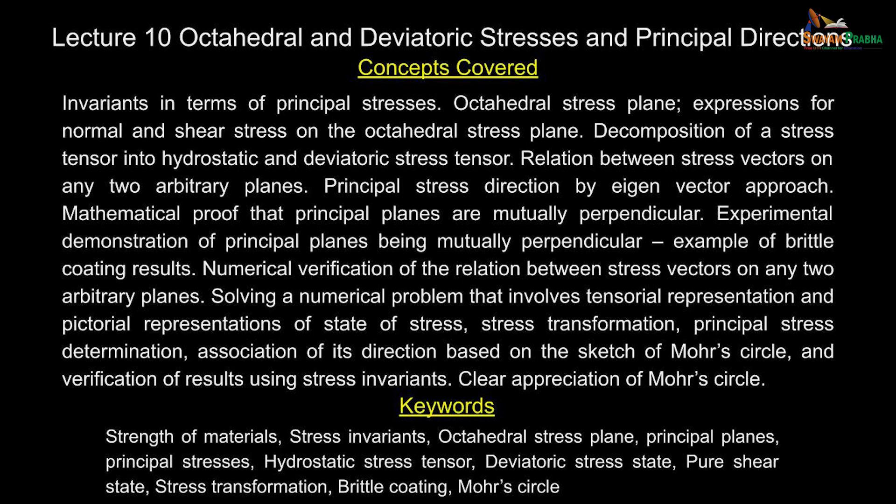See, we have been discussing principal stresses, and I said if you express the stress tensor at a given point in terms of principal stresses, there are certain advantages. Your mathematics becomes a lot simpler. And while developing the principal stresses, we have also looked at what stress invariants are. Stress invariants help us to have inbuilt checks in our calculations.

That is one advantage. The other advantage is it can also be used to investigate whether the given stress tensor corresponds to a simple uniaxial stress or pure shear stress state. Fine. We will also look at what the other aspects are.

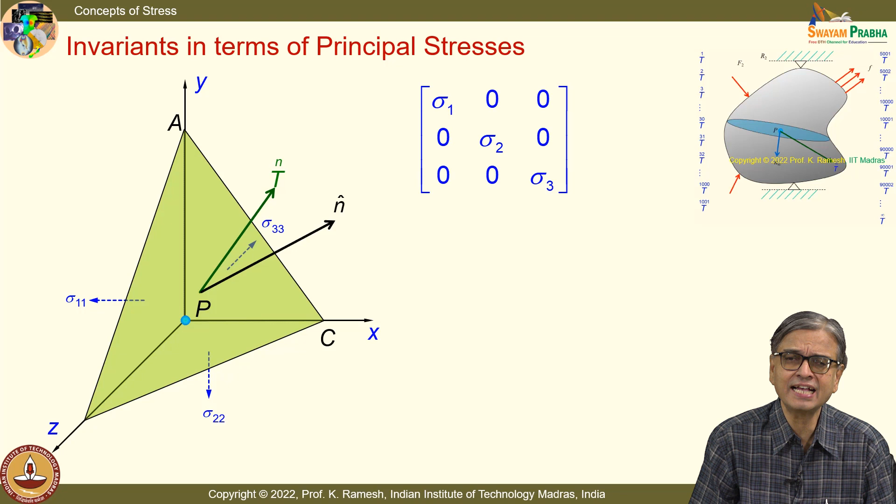See, when I look at the stress tensor in terms of principal stresses, and in order to distinguish, I have put this in a different color. You can also see that these are all normal stresses, and the invariants become very simple. Can you write the invariants I1, I2, I3 quickly? You know the definition of the invariants. I1 is straightforward, that is very simple. You should be able to write I2 as well as I3. When I express it in principal stresses, the computation is so simple and straightforward, it hardly takes a minute.

Fine. So, I have I1 as sigma 1 plus sigma 2 plus sigma 3, and I2 simply becomes sigma 1 sigma 2 plus sigma 2 sigma 3 and sigma 3 sigma 1, and I3 is sigma 1 sigma 2 sigma 3. So simple and elegant. So, there is good reason to visualize the stress at a point in terms of the principal stresses. And I also said many of the failure theories are essentially constructed around the principal stresses. Fine. So, it has an advantage, and you can combine loading from various individual loads, assemble the individual stress tensors to get the final stress tensor, from it get the principal stresses and adopt one of the failure theories.

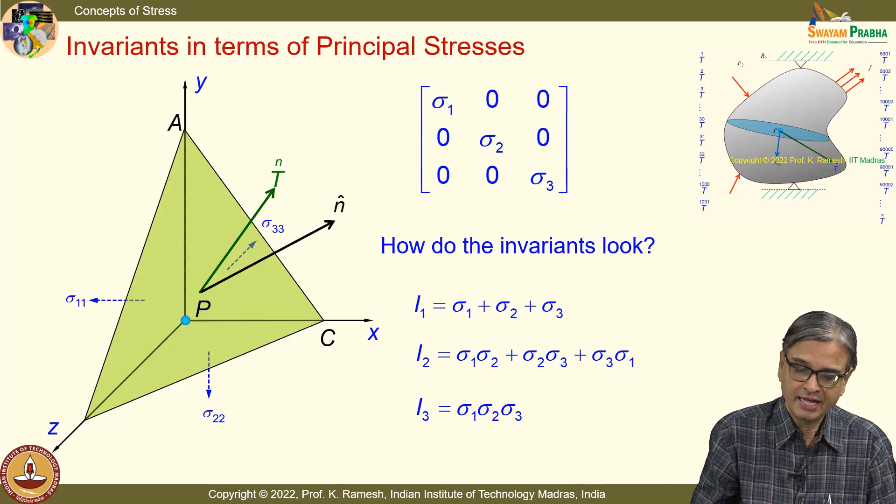And people have also looked at newer planes. I said some planes are very important. We have looked at the principal stress plane, we have also looked at the maximum shear stress plane. Fine. From principal stresses, people also looked at, when they were working on plasticity, what are known as the octahedral stress plane.

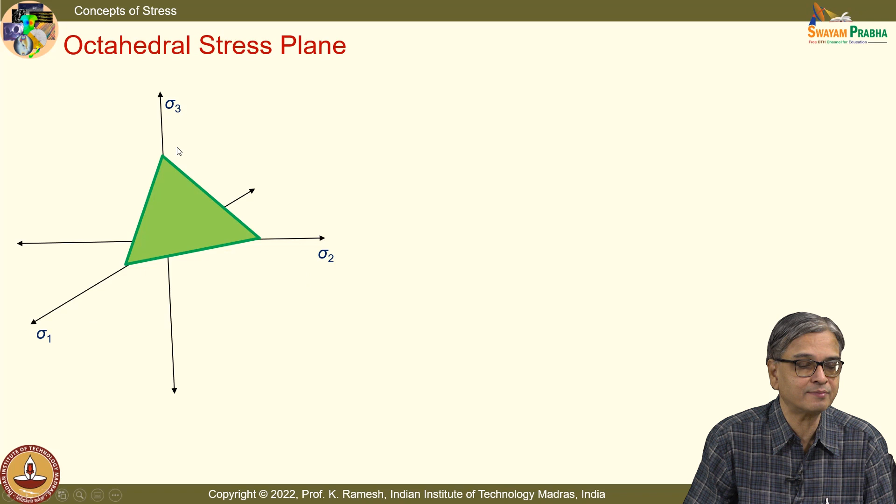And what you have is, I have the reference axes as sigma 1, sigma 2, sigma 3, and this plane is equally inclined to the reference axes. And we have already said certain planes are very important, and in that list you also include the octahedral stress plane. Why is it called octa? I have this quadrant, I can have 4 such in the top half and 4 such in the bottom half, then I will have 8 such planes identified.

And whenever you have an arbitrary plane, the stress vector can be resolved into a normal stress component as well as a shear stress component. And we have looked at how brittle materials fail by normal stress, and ductile materials are sensitive to shear stress. And once they have determined this octahedral stress, they have also looked at what happens to octahedral shear stress. I said multiple failure theories have been created.

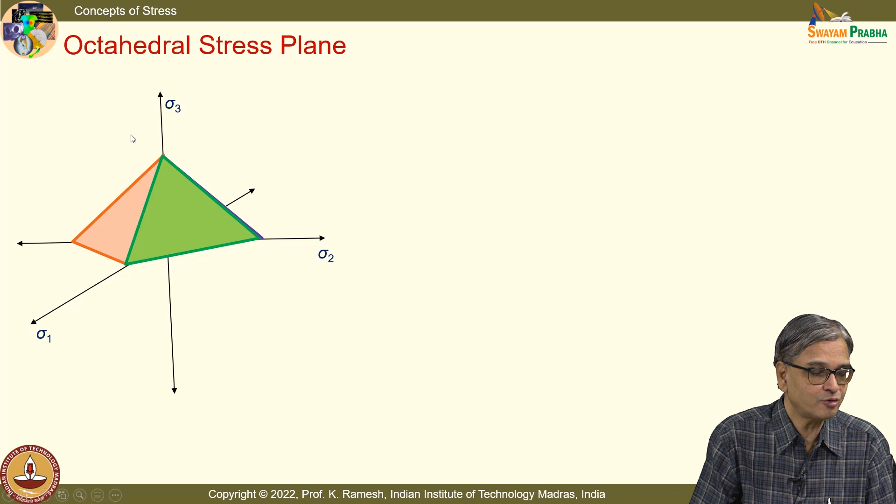So, when you understand the state of stress at a point, whichever aspect, if it is a normal stress, what happens when the normal stress reaches a critical value. If it is a shear stress, look at what happens when it reaches a critical value. On a similar line, people have also developed theories on what happens when octahedral shear stress reaches a critical value. So, for the term octahedral, I can have 4 such planes in the top half and 4 such planes in the bottom half, and they are nicely colored to give you some enthusiasm in learning this course. Do not think that these planes are colored, okay.

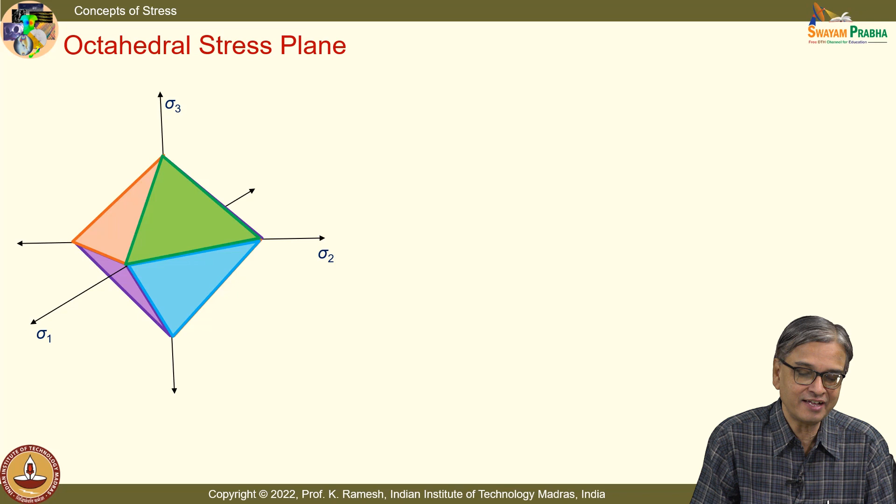These are normal planes, colored only to keep your attention, and the development of this goes to Arpad Nadai. I mean, he lived very recently. See, the plasticity theory really developed in the early part of the 20th century. Fine. And people thought they needed this octahedral shear stress also. Now you can find it out, because you have sigma 1, sigma 2, sigma 3.

In the last class I said, when I have a plane, the plane is now defined, it is an equally inclined plane. You can find out mathematically the expression for the normal stress and the expression for the shear stress. Can you work it out and then check it with me?

Because you were supposed to do a homework yesterday, I am not sure whether all of you have done it, because the ground rule is you tell the homework, it is never done.

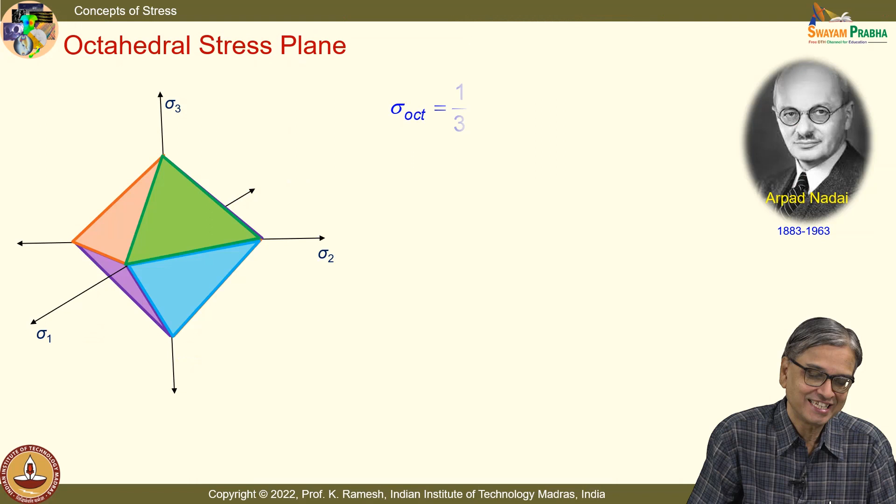Okay. So, I have octahedral, the normal stress is very simple to write, that is 1/3 of sigma 1 plus sigma 2 plus sigma 3. I get this as, in terms of invariant, 1/3 I1.

You can also write the octahedral shear stress, and you will find that that can also be expressed in terms of the invariants. Okay. And the tau octahedral is given as 1/3 of sigma 1 minus sigma 2 whole square plus sigma 2 minus sigma 3 whole square plus sigma 3 minus sigma 1 whole square, and the entire expression is under square root.

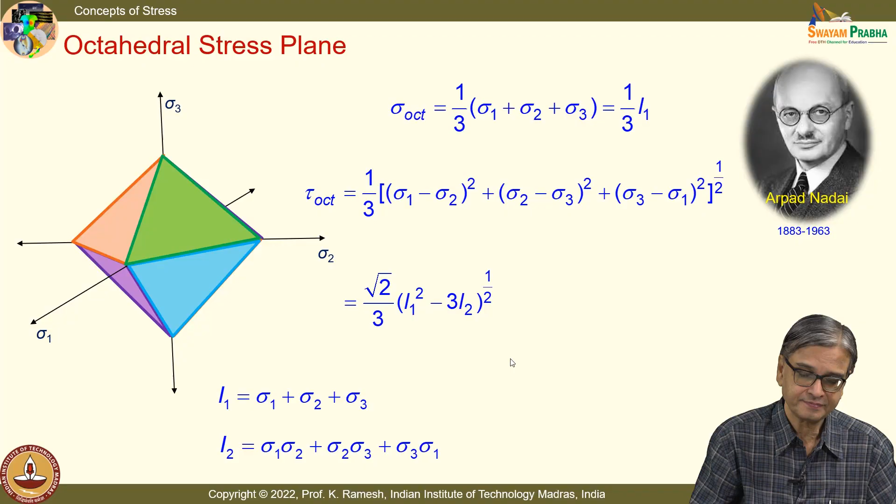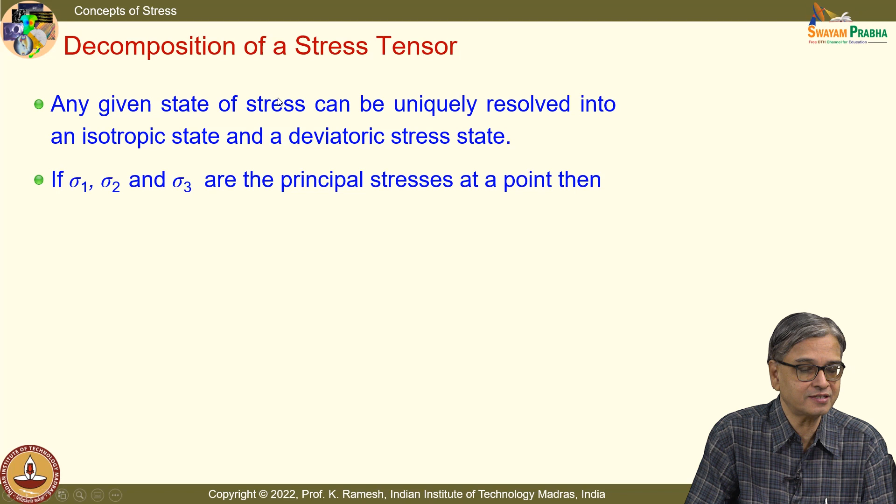And people also thought, I have been saying that we are happily living in linear elasticity. So, I can superimpose stress tensor, and any given stress can be uniquely resolved into an isotropic state and a deviatoric stress state. So, you have to look at the stress tensor, the way I decompose, and you have to figure out what is the meaning of deviatoric. Okay. So, I have the stress tensor expressed in terms of the principal stresses sigma 1, sigma 2, sigma 3. So, you will write the stress tensor in this fashion, sigma 1, sigma 2, sigma 3 in the diagonal term,

and this is written as a superposition of an isotropic state. That means I have a constant value. The value of P is identical in all the three directions. That's what happens when you immerse anything inside a fluid bath. Suppose I have put it below 100 meters in a liquid, you find it is a hydrostatic compression. Okay. Now we have to choose what is P. What is the way you have to select P? That matters. And P is taken as 1/3 of sigma 1 plus sigma 2 plus sigma 3.

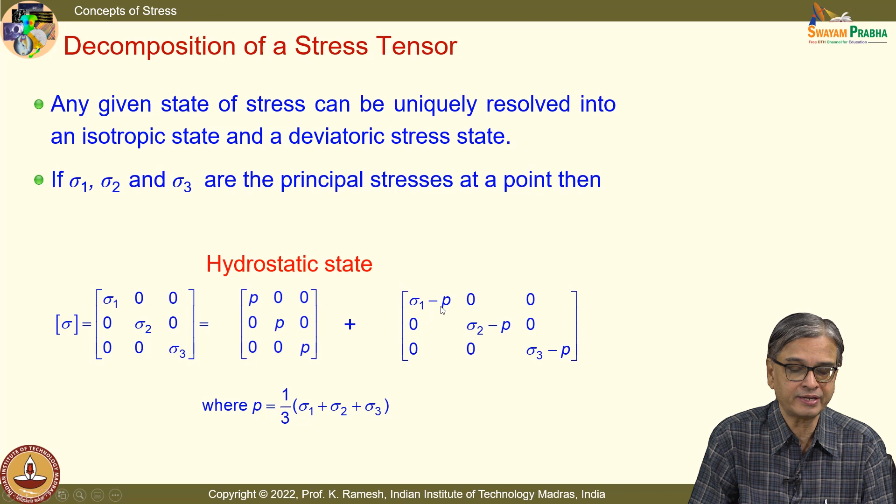So, can you fill what should be the stress tensor that adds up to sigma 1, sigma 2, sigma 3? Can you fill the next one? You can easily do that, because I have separated out a part where the stress magnitudes are P, and we also understand that this is a hydrostatic state. And if I have to have the addition equal to sigma 1, sigma 2, sigma 3 on the diagonal, the stress tensor is simply sigma 1 minus P, sigma 2 minus P and sigma 3 minus P.

Can you comment from whatever you have learned so far what this represents, from what we have discussed? Anybody can make an intelligent appreciation of what this stress tensor is? This is definitely called a deviatoric stress state. I have not deliberately given what is the other name. I want you to find out and tell me from what we have learned so far.

I can give you the clue. Use the invariant. We have looked at invariants have some advantage. It is learnt very recently. This stress tensor represents what kind of stress state? That means you are sleeping. You are not exercising your mind. You have learnt it just in the previous class.

I am asking, you have a stress tensor. When some stress tensor is given, you can find out what stress state it represents. I gave a clue that you can arrive at the stress state by looking at the invariants. And this is a simple mathematics that you will have to do. Somebody said, I am able to hear some voices. Yeah. This is? Because I1 is 0. You should be able to see that. See, if you don't see that, then you are not learning. It's not that you simply copy down whatever is discussed in the class without assimilation. You are able to see now? I have separated this stress tensor into two components. One is a hydrostatic stress state.

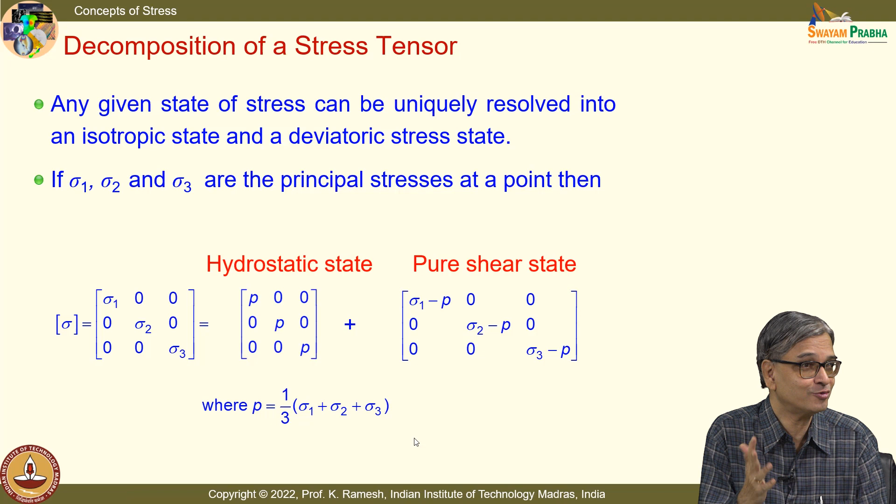You understand? If there is truth, whichever way you start and investigate, I must get one answer. Only that is truth, no matter which way I have looked at it. While developing the state of stress at a point, we looked at a graphical representation like the Mohr circle. We understood how to evaluate principal stresses. Then we did mathematical development. That also gave identical expressions, isn't it? We will also see some experimental information which will add up to this knowledge. If you look at any of these branches developing, people have verified it again and again. Because you are developing a new body of knowledge, it has to be verified. It's not that you wake up from your dream and say this is the result and everybody should accept it. Science doesn't go that way.

Let us go back to the orientation of the principal stress using the Mohr circle. This is a very useful utility of a Mohr circle. You don't have to sketch it with geometric accuracy. It can be used to find out the principal stress orientation unambiguously. And you have this principal stress 1. It is given as 2 theta 1. This is an acute angle, and you have an obtuse angle with respect to the x-axis for the principal stress direction 2. You label it as 2 theta 2.

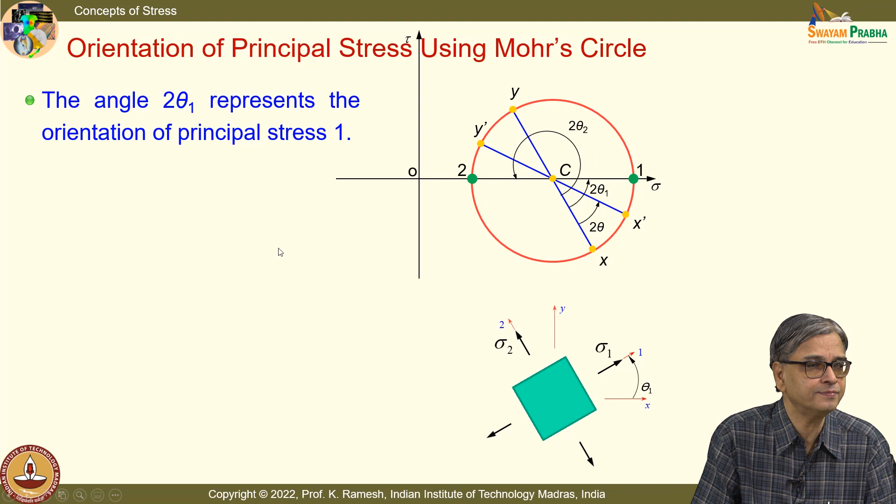And why do you need this? When you have the expression theta equal to 1/2 of tan inverse of 2 tau xy by sigma x minus sigma y, you have to recognize that this is a multi-valued function. It is not a single valued function. Once you get the result, you will have to investigate which of them represents the principal stress 1 direction and which represents the principal stress 2 direction by making a simple sketch, and you can quickly find out. I would like you to develop that habit. When you have sigma 1, sigma 2, sigma 3, you arrange them algebraically. You cannot do the same for theta 1, theta 2, theta 3.

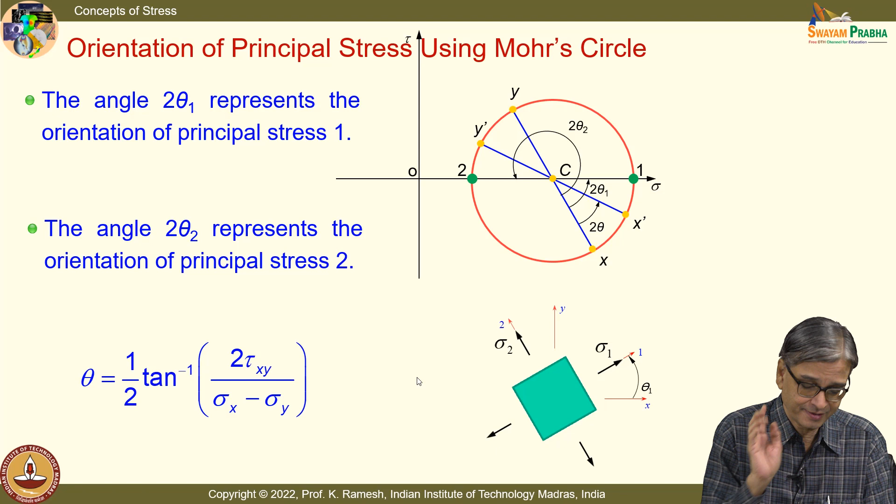When sigma 1, sigma 2, sigma 3 are distinct, I will have different directions associated with the principal stresses, and they are mutually perpendicular. We have seen mutually perpendicular from the Mohr circle, fine. We have still not established it as mutually perpendicular from a mathematical perspective. I will also try to give an experimental perspective which was done in the early part of the 20th century, so that you can get convinced when I say principal stresses, they are mutually perpendicular. These are all very celebrated results. The celebrated results have been verified multiple times in the history of evolution of engineering.

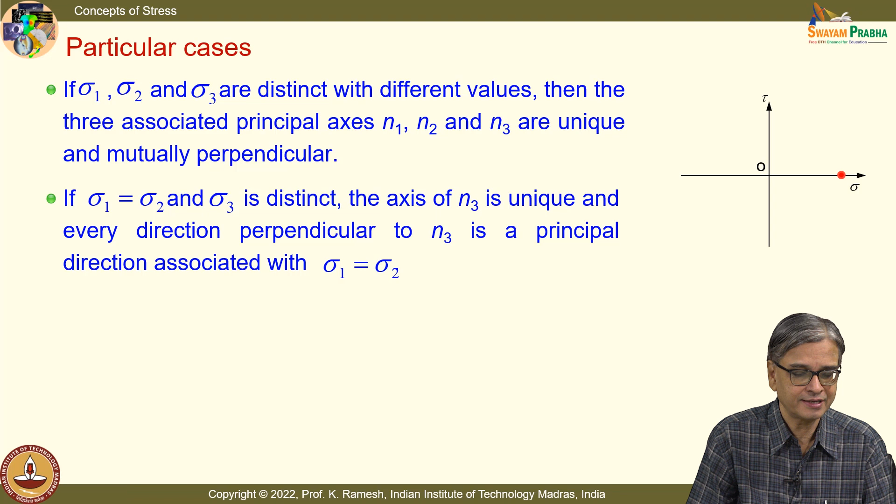Suppose I have sigma 1 equal to sigma 2 and sigma 3 is distinct. What happens to a Mohr circle? It becomes a point. Is the idea clear? When you have that as a point, the expression for the radius goes to 0. When this goes to 0, it implies shear stress is 0, and zero shear stress is the definition for your principal stress planes. That is the reason why every direction perpendicular to the sigma 3 direction is a principal stress direction. On this plane, every direction is a principal stress direction. So, these are all special cases, fine.

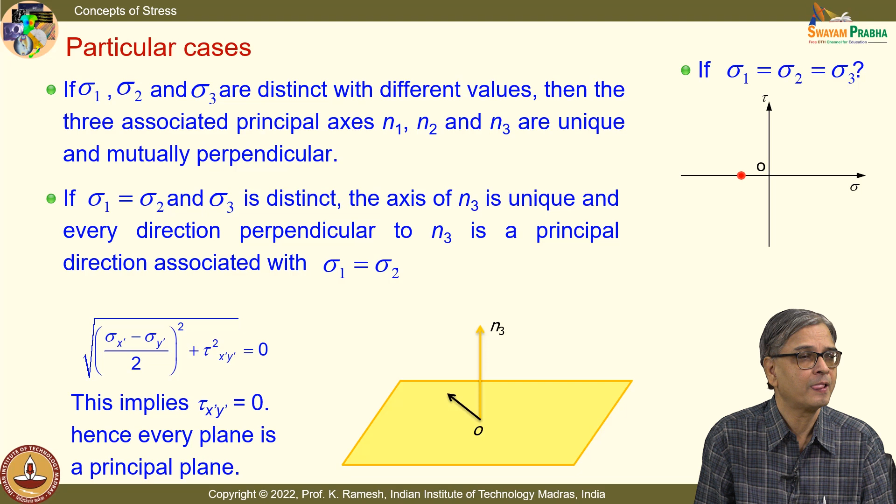While developing the principal stresses mathematically, I made a statement that this can also be solved as an eigenvalue, eigenvector approach, but we did not solve it like that. I got the determinant as 0, I pulled out only the 2-dimensional case, and it was a quadratic equation, so it was tempting to solve by a simple quadratic approach, and we got the numbers. We got sigma 1, sigma 2, sigma 3, we never worried about the directions. Now, we will see how I can evaluate the orientation from a mathematical approach, because you are living in the computer world.

If you depend only on a graphical approach, it will not help these days. So, you should also have a mathematical methodology that helps you to do that, and it is very simple, very straightforward. I just take a two-dimensional case. In this case I have the eigenvalues as sigma i, representing 1 and 2, and the direction cosines associated with this are given with a subscript i.

If I take a two-dimensional case, I already find out the principal stresses using the quadratic expression. So, substitute sigma 1 instead of sigma, and I have this expression. Can I use this to solve for nx and ny? You have two simultaneous equations, you can easily solve for two unknowns. It is straightforward. I use the second equation to get the expression for nx, and we also know nx squared plus ny squared equals 1.

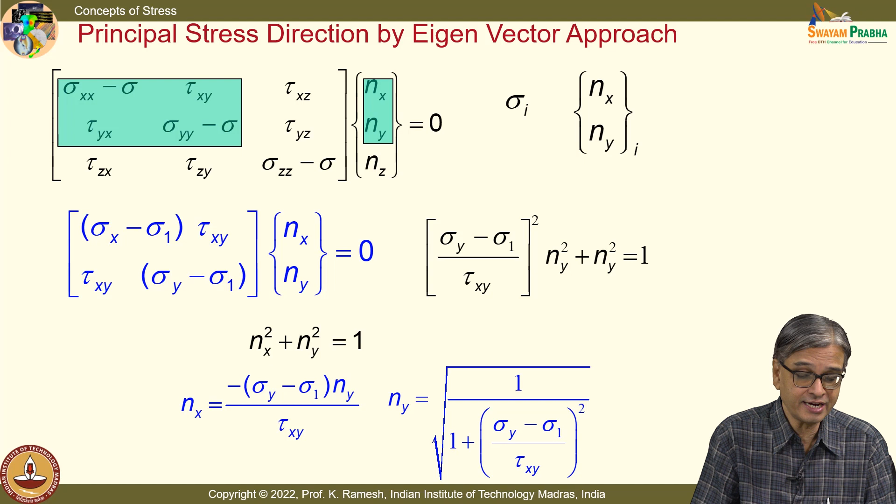isn't it? So, you should investigate what happens when ny is positive and when ny is negative, and I get the theta orientation in a simplistic manner as theta equal to tan inverse of ny by nx. So, take up a simple stress tensor and find the principal stress direction using your conventional approach of Mohr circle, and also use this and substitute for both the positive root and negative root, and have a clear understanding of how this expression helps you find the associated direction. If I have taken sigma 1, this will invariably give you the direction of sigma 1 only. You do not have to go to Mohr circle and then verify. Convince yourself by solving test problems created by you. Is that idea clear? Okay.

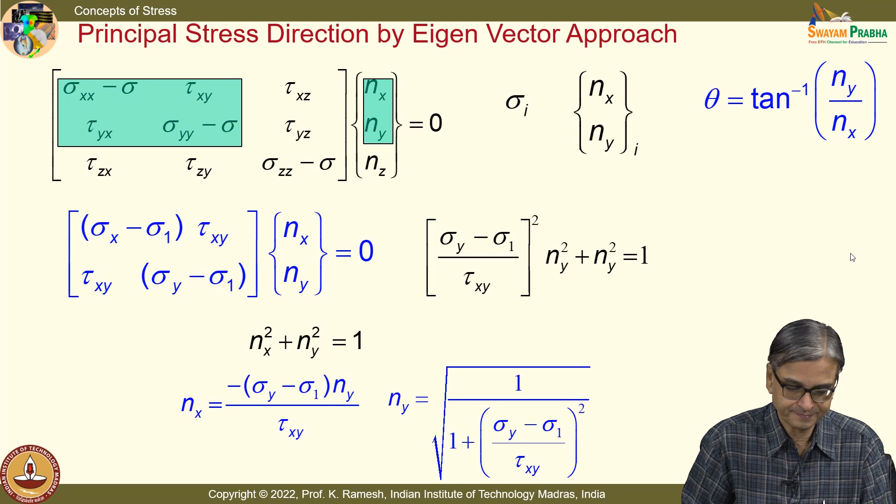This also I asked you to try yesterday as a homework. How many of you tried? Once people develop certain concepts, the mathematicians do not keep quiet. They try to find some identities. Suppose I take a point, and an arbitrary plane n, and I know the stress vector is Tn, and I take another arbitrary plane n prime. With our symbolism, the stress vector acting on that is Tn prime, and mind you, these are vectors. We have already understood, so we will not put the vectorial notation. It is easy for us to interpret once you understand the nomenclature mentioned in the earlier classes.

You have an identity: Tn dot n prime equals Tn prime dot n. This is a vector, this is a vector, and this is the representation of the dot product. Whatever software we have used to write the equation puts the dot product only like this. Earlier I tried to show it with a big dot, later on I gave up, because it is becoming difficult to edit every equation. So, you understand that this represents the dot product. This identity we will verify, and we will also use it to show that principal stresses are mutually perpendicular.

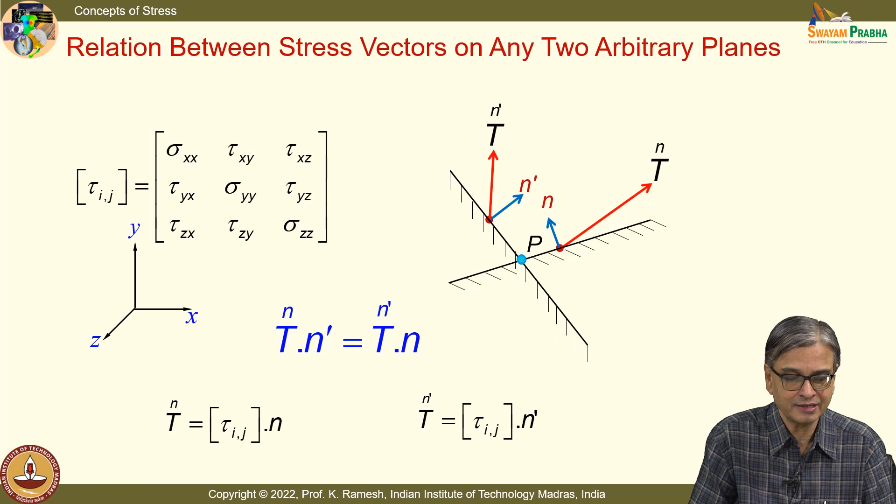First, we will take this identity. If you have done the longhand mathematical expressions, if you have calculated what is Tn prime, and if you have done the dot product, you would have got both the expressions identical. Fine, which you should have done as a homework. Nevertheless, we will verify it in a different manner. But before that, I would like to show mathematically that principal stress directions are mutually perpendicular.

So, I take this identity and say that the principal stresses are sigma 1 and sigma 2, and from Cauchy's formula I can find the stress vectors Tn and Tn prime. If I look at the identity, they have to be equal like this. So, if I substitute for Tn and Tn prime, I get sigma 1 n dot n prime equal to sigma 2 n prime dot n. In a generic problem, sigma 1 and sigma 2 are not equal. But if you have to maintain the identity of this, what should go to 0?

You get the point. The dot product of n and n prime should go to 0. That is what this equation says. When I have this identity to exist, if the dot product is 0, the identity is validated. When does the dot product go to 0? When the directions are

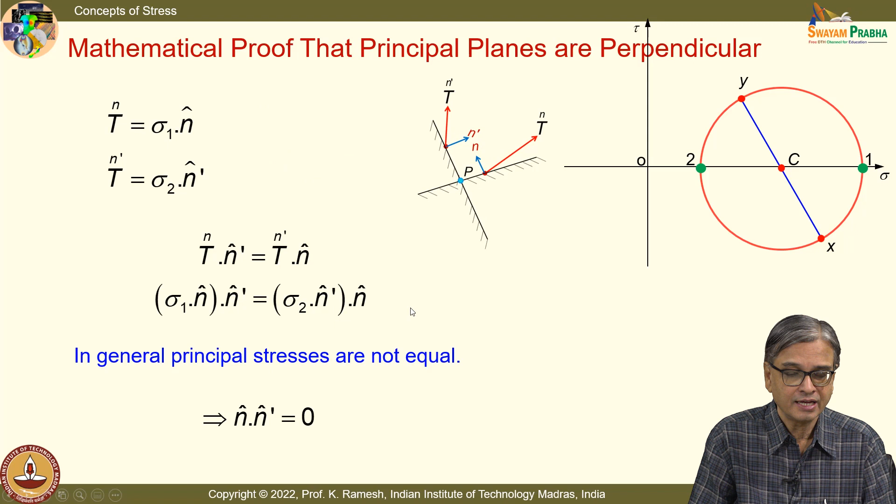mutually perpendicular. Okay. So, that means I have this one on diameter, which we have already learnt while doing the Mohr circle, and you have these two planes perpendicular to each other. The principal planes can only be perpendicular. It is a mathematical development. Fine. Now, we go and take a simple stress tensor and then verify mathematically whether this identity is existing. Okay.

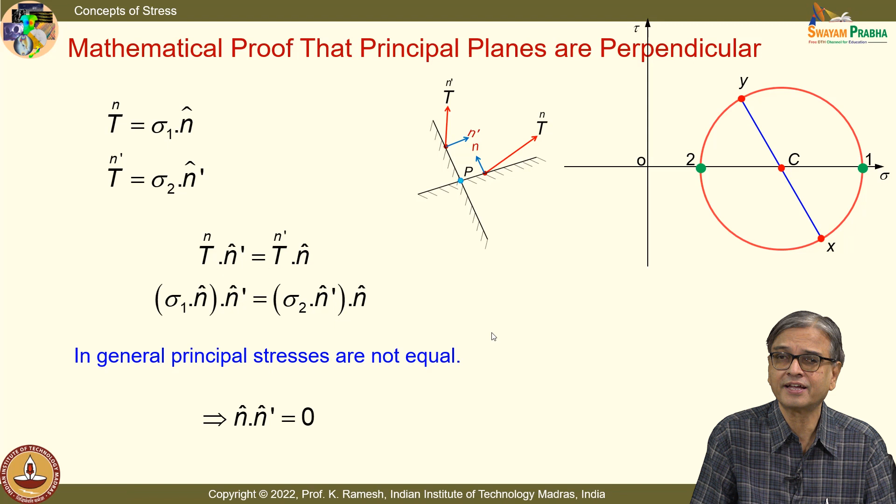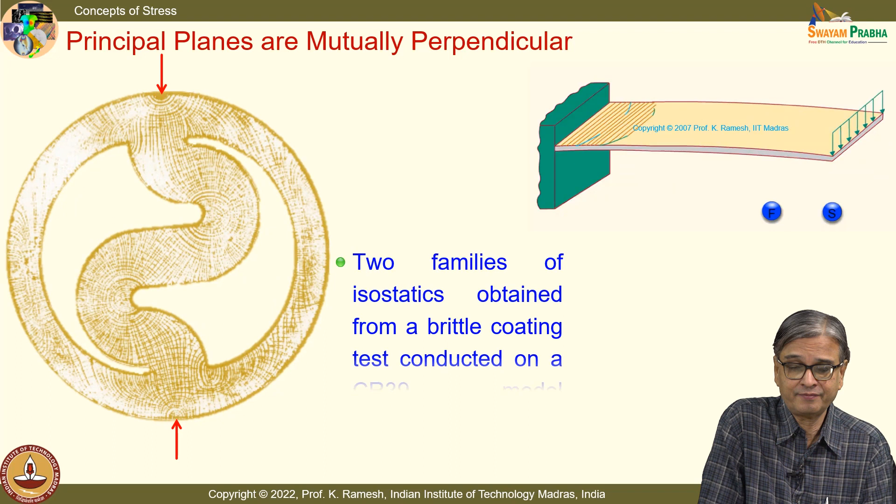Okay, before that I think I have experimental verification of this. See, you are all now familiar with failure of a chalk. How does a chalk fail? When the normal stress reaches a maximum, it fails. And we have also classified that kind of failure as associated with a material which is brittle. And what is done here, very beautifully, is a cantilever beam on which you spray a paint which is a brittle material. And when I apply the load, what you find is you have cracks getting developed.

Can you associate the crack to a physical reality? That means the normal stress at that point has reached a maximum. That is why the crack has formed. So, tangential to the crack is the principal stress direction, one of the principal stress directions. Perpendicular to that is the other. See, principal stresses are mutually perpendicular. So, the direction perpendicular to the crack as well as tangential to the crack are principal stress directions.

People have done this, and it is a very complicated experiment because it is done in compression. So, I have to spray the paint when the object is compressed, then slowly release it. I will get the first set of cracks, and then apply the load again and slowly release it. I will get the second set of cracks. If you see this here, do you see the two families of crack patterns? They are orthogonal patterns. Two families of isostatics, these are called isostatics, and this technique is called brittle coating. This was done in the early 1930s or so. This is the only experimental proof that demonstrates that principal stress directions are mutually perpendicular.

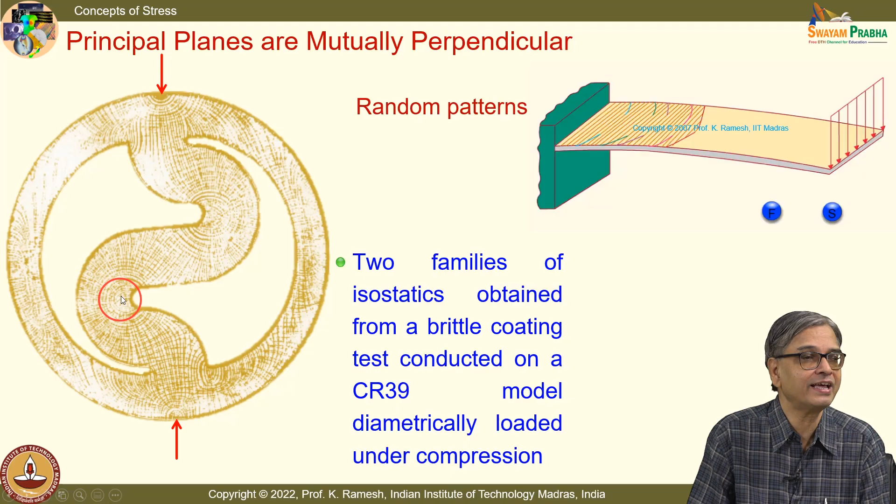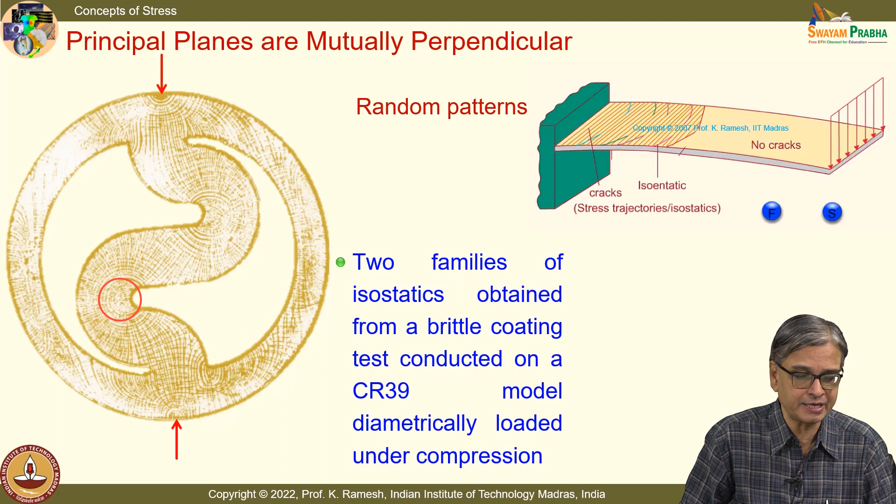But before that, I would also like you to see one region here. Here, if you look, the cracks are random. We have also seen that when sigma 1 equals sigma 2, every direction is a principal stress direction. So, that means a crack can appear in any direction depending on the local weakness of the material. Fine. And I also show a blown up image of this. Here you can see that you have two orthogonal families.

Are you getting convinced? Can you make at least a few line sketch of this region? I have one family of crack pattern, another family of crack pattern. They are mutually orthogonal. And this is demonstrated from point to point. See, you are actually discussing state of stress at a point of interest. When you go to whole field experimental techniques, you get a picture of what happens on the field. You need that kind of information also. Imagine stress tensors were developed in 1822 and your verification whether principal stresses are mutually perpendicular happened experimentally in the 1930s. Until then, they didn't have this kind of an experimental approach. And this convincingly proves that principal stresses are mutually perpendicular.

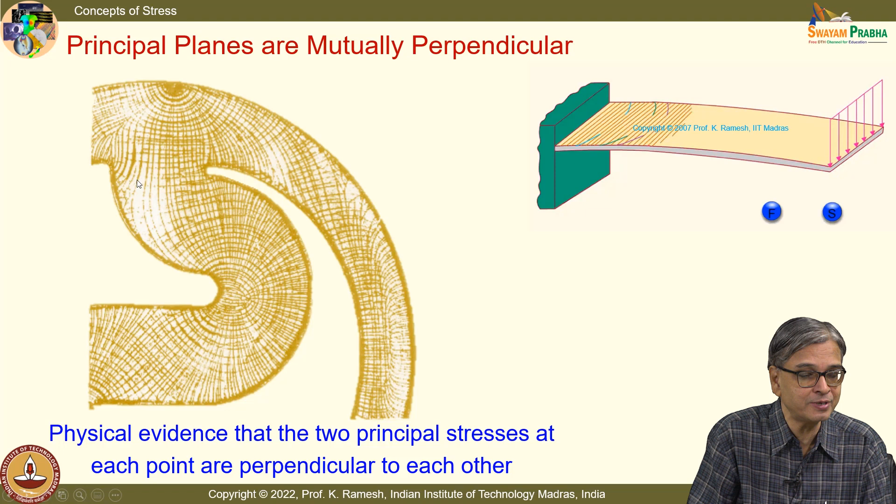So, in science, when people make statements, they verify them from various perspectives. So, when you do your mathematical calculations also, I want you to use these stress invariants and effectively use it to verify your results. You can verify it yourself. It is not that only when your answer book is corrected by me, I verify whether your answer is right. You can verify yourself whether you have got the correct answer when you do stress transformation, when you do principal stresses. So, certain aspects of a calculation you can verify. If there is a possibility to verify, utilize that. Don't be in a hurry, where you followed it, got some number and just write it down. I expect you to verify.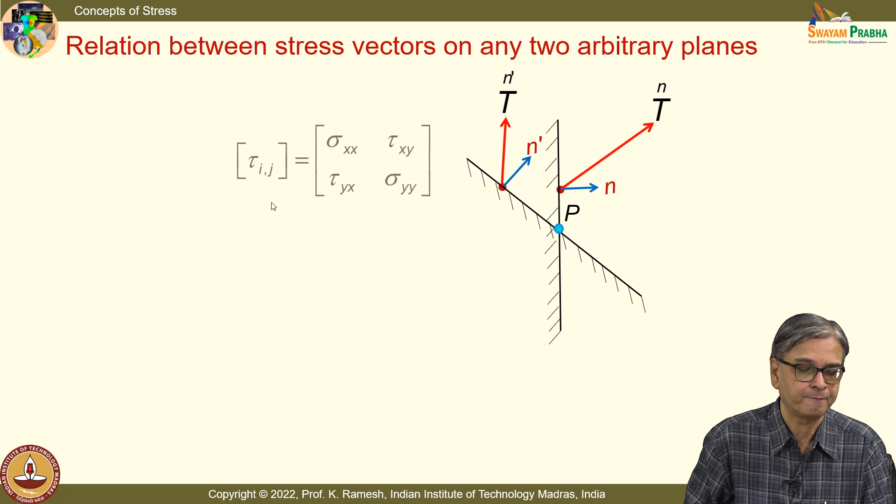So, I have the stress tensor given, I have 1, 0 as the plane, and I have this Tn dot n prime if I want to calculate. Can you get Tn from Cauchy's formula? And then you can verify what is Tn dot n prime. Very simple to do. I have n prime as 1 by root 2, 1 by root 2. I have all the quantities that I need.

So, when I do this, I get 100i plus 52j multiplied by 1 by root 2 i plus 1 by root 2 j. That gives me 152 by root 2. Can you do Tn prime dot n? When you do that, you will find that this is also identical. Very simple calculation, it is not very complicated or anything like that. But if you do that, you will remember the identity Tn dot n prime equal to Tn prime dot n.

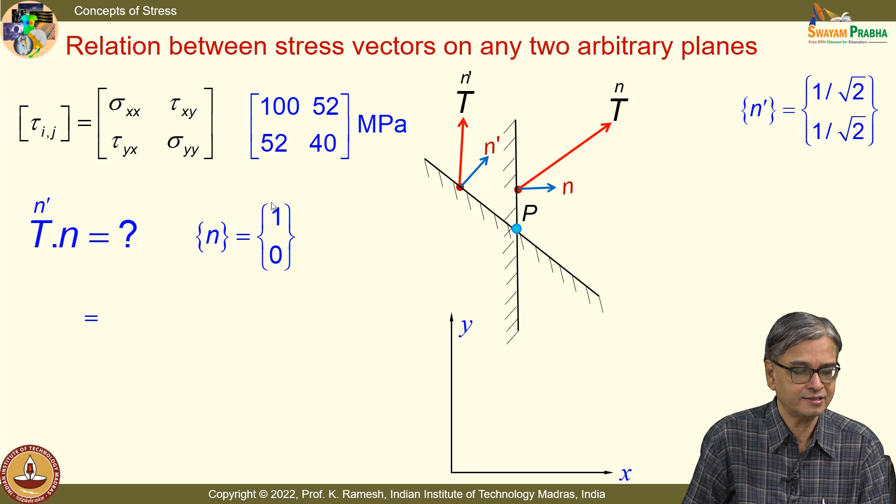I have the direction cosine. I have to get Tn prime and I have n, all the quantities are there. So, when I do this, I get again 152 by root 2. So, this shows that you have the identity. We have already utilized the identity to prove that principal stress directions have to be perpendicular mathematically.

And we have also seen by a beautiful experimentation called brittle coating, you have two families. You have also seen the whole field representation, not just at a point. That is very difficult to do. That is why it took so much time and it was done by Durelli. Fine. He was a proponent of that technique. Now, we will go for stress transformation, principal stress direction, and so on and so forth.

I have a pictorial representation. We have already seen you have a pictorial representation. Can you write the tensorial representation? If the pictorial representation is given in this manner, can you write the tensorial representation? Once you write the tensorial representation, can you go and give the graphical representation? You should be able to do it quickly, because we have spent sufficient time on developing the fundamentals.

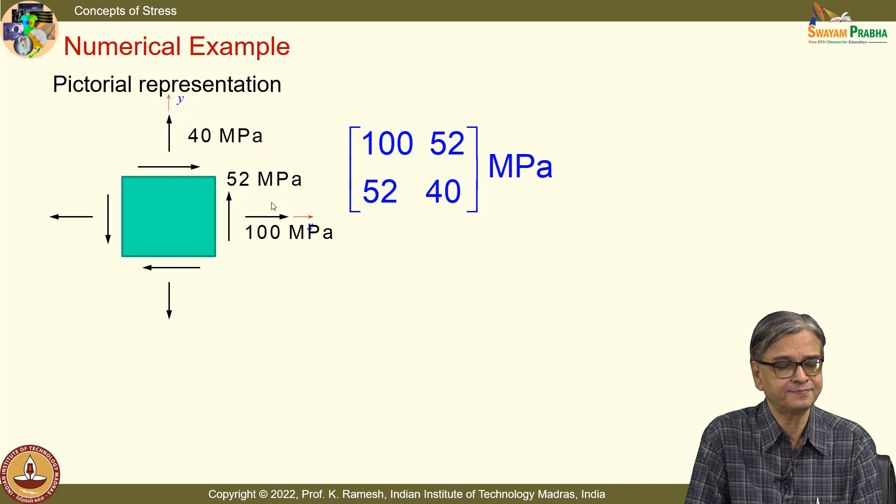Stress tensor can be given pictorially, can be written in tensorial fashion, can also be given to you in a graphical manner. I can also give you a Mohr circle and ask you to do calculations. So, the tensorial representation is the same one, 100, 52, 52, 40. And can you draw the Mohr circle? Mohr circle is very straightforward, and you have to mark the x and y plane correctly. If you draw it with the convention, if you rotate in the clockwise direction in the Mohr circle, you can also rotate in a similar direction in the physical plane to locate the plane of interest, whether it is clockwise or anti-clockwise, whichever way.

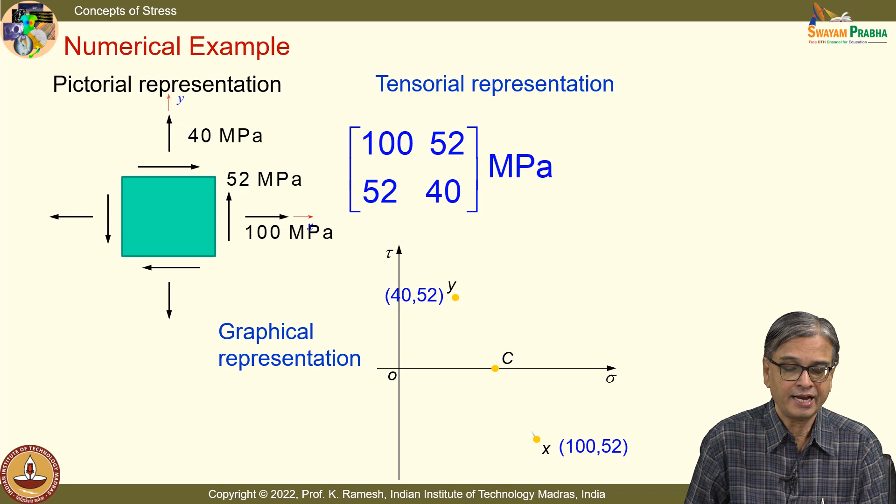So, I have the graphical representation like this. I have the sigma and tau axis. So, x plane will come in the first quadrant or which quadrant? Fourth quadrant. Okay. So, I have the x plane, I have the y plane, join them and I get the center and draw the circle. So, I have everything. Any plane of interest, if you say, I can go to the Mohr circle and get it, but we would also like to do it mathematically.

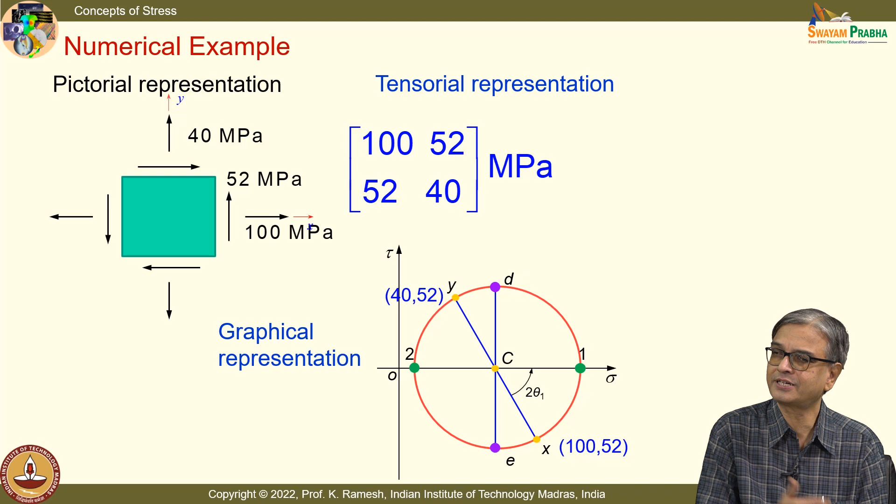You also know that you have the principal stresses 1 and principal stresses 2, and from this diagram you can say the acute angle is sigma 1 direction and obtuse angle is sigma 2 direction. If I do the calculation, if my multivalued function gives me acute and obtuse angle, I should correctly filter out which is theta 1 and which is theta 2. And you have the maximum shear stress representation. So, what we will do is, we will go and find out the principal stresses mathematically. You have the expression. Can you get me the principal stresses?

You have the mathematical expression, you have the identities. Now, what I would request is, when you get the principal stresses, also verify from the invariants. You develop that habit right now. So, I should get I1 and I2 wherever that is relevant. In many cases, even I1 should be sufficient, but while we develop the practice, it is better that you calculate I1 and I2, then it will become familiar when you want to do the expressions that require I2 to be determined.

So, what is the value of I1? It's 140. What is the value of I2? Calculate.

I get I2 as 1296. So, the habit is get the invariants calculated, find out the principal stresses. Anybody has found out the principal stresses by using the quadratic expression?

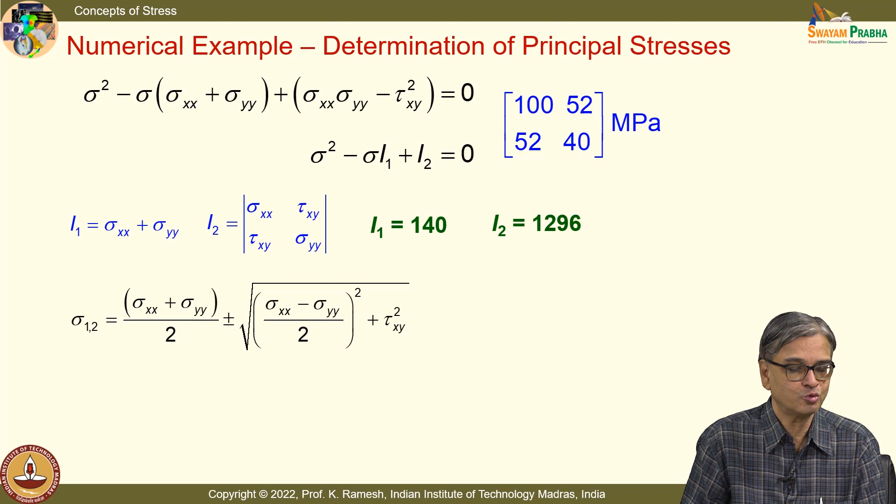Okay. So, you have this basic expression and you get sigma 1 as 130.03 and sigma 2 as 9.97. I have to give the decimal places, because when they add up, does it add up to 140? It adds up to 140. So, that is an inbuilt check, fine.

And you have the expression for theta, and when I get this, first write it as like this. Theta can have 30, 120 and all that. Do not jump and write whatever the first value you have as theta 1, second value as theta 2, do not do that. We have to qualify, and for this you can take the advantage of Mohr circle. You have the acute angle. So, I can label the acute angle as theta 1 and the obtuse angle as theta 2.

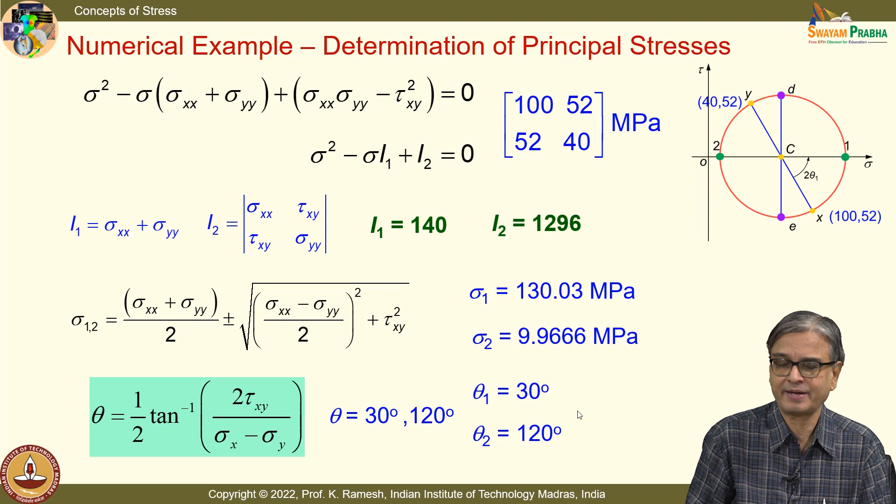I am telling you a recommended procedure. Verify the invariant and also use the Mohr circle to label the theta 1 and theta 2 directions. It is very fast, and you also use the Mohr circle in a very effective manner. Suppose I ask a question, I can also represent the same stress tensor in terms of principal stresses. The same stress tensor, state of stress at the same point, can be expressed in a different manner. I want you to recognize that. In this representation, I have zeros, that makes my mathematical development very simple.

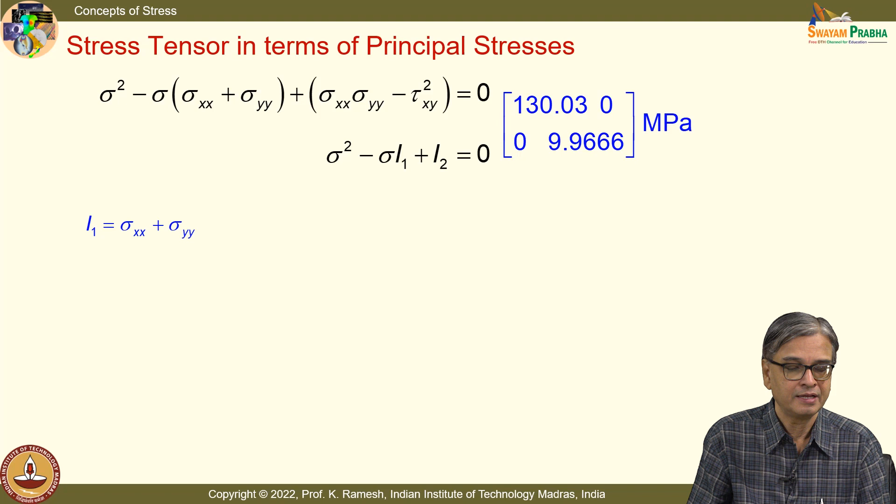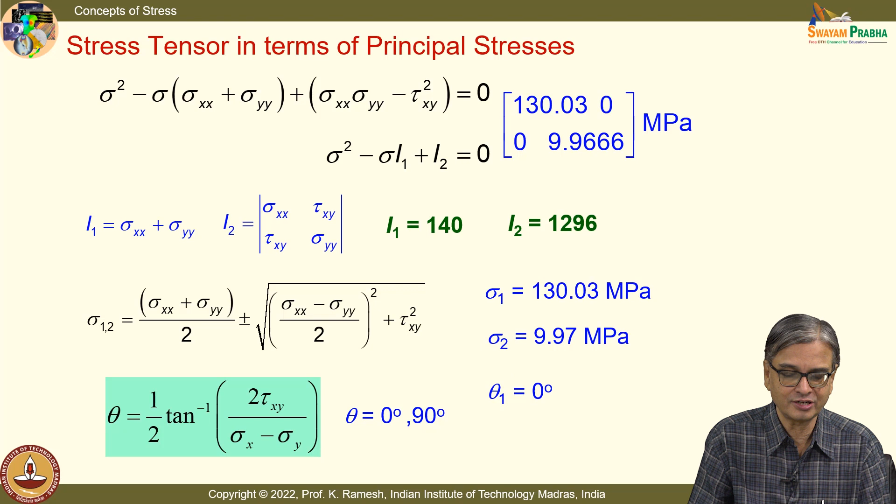Okay. And this is trivial, let me not spend time on this, because I can get I1, I2, I can also say that these are the principal stresses again, and then say theta 1 and theta 2 are 0 and 90, that is straightforward representation. But what we will do is, we will find out for an arbitrary plane the stress tensor. For us to make life simple, let me take a plane at 45 degrees, theta equal to 45 degrees.

I have told you how to write the expression based on the indicial notation. Can you write the expression for sigma x prime, tau x prime y prime, sigma y prime? Can you write it down? That is a practice. See, you have to pick up speed in some sense, fine. But verification, inbuilt verification, wherever it is possible, you should be able to do that. You should not shirk from that. That is the idea behind it.

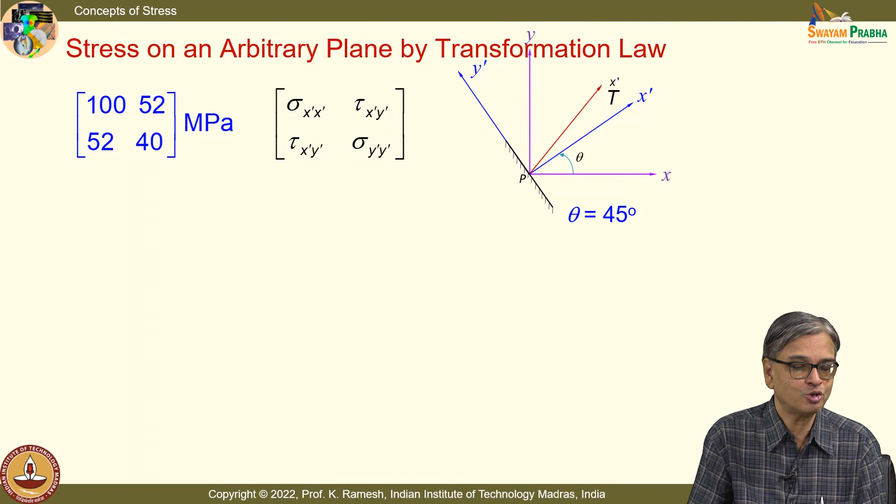So, you have the expression sigma x prime, we have seen it several times in the class, tau x prime y prime, and you also have sigma y prime, and when I substitute the stress magnitudes as well as theta equal to 45, this comes out to be 122 MPa, and tau x prime y prime is minus 30 MPa, and sigma y prime is 18. Can you verify whether our computation is correct? Check the I1. What is the value of I1? Again 140. So, that means we have done the stress transformation correctly. So, that aspect I want you to absorb.

Can I find out what is the principal stresses based on this representation of stress tensor at the same point? Ideally, what I should get? I should get the same result like what we have got earlier from a different stress tensor. Do the computation. You can easily verify it. You should be in a position to do that, and also verify whether your I1, I2 are identical, and how do you label the principal stress direction. Principal stress direction will be different now. Principal stress magnitudes will be same, but I am looking at from a different plane. So, principal stress directions will be different. So, with that idea, if you utilize your Mohr circle effectively, you will find it useful.

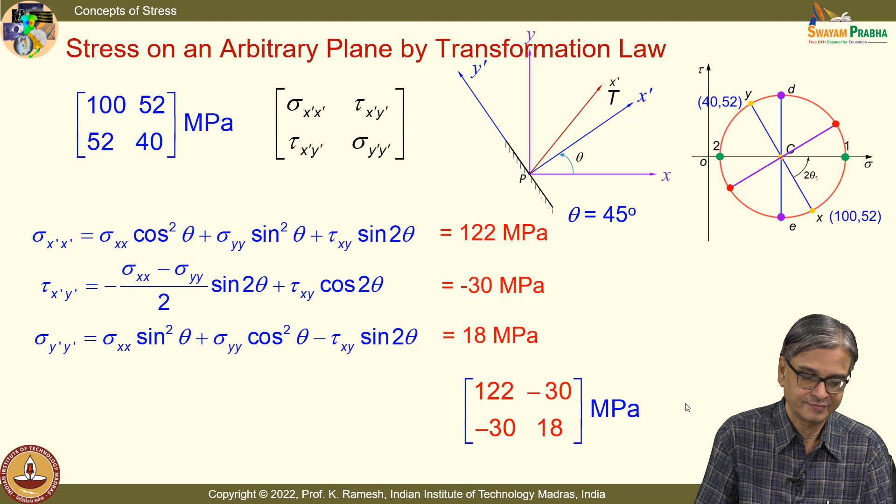By the time I will have the other computations shown on the screen. So, this is just to make you recognize the steps. I have the I1 and I2, and then when I use the quadratic expression, I do get the same magnitude of sigma 1 and sigma 2. Tell me the principal stress direction. What are the values that you have got now? Anybody? At least I should have one student completing the computation.

Is the idea clear? You have the expression for theta, 2 tau xy divided by sigma x minus sigma y. My suggestion is write all the values from that as theta, and comparing it with the Mohr circle, label that as theta 1 and theta 2. Anybody has got the values now? I think it is taking a little more time than I anticipated. Okay, I will give you the values.

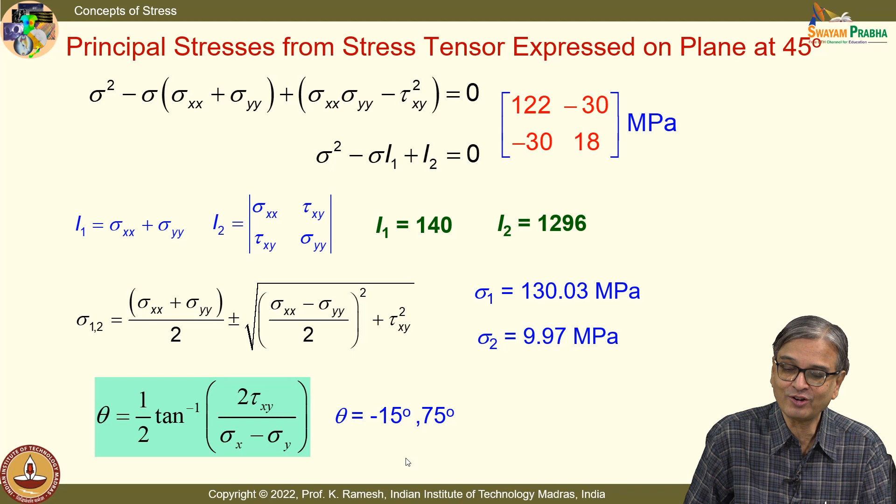How many of you have got minus 15 and 75? Okay, then why did you not tell me? Okay. So, I look at the Mohr circle. From the Mohr circle, I can say theta 1 is minus 15. Why is it minus? It is clockwise. Fine. I have this as the reference plane. From this plane, I have obtained the theta direction. Is the idea clear? Do you know how to do the computation?

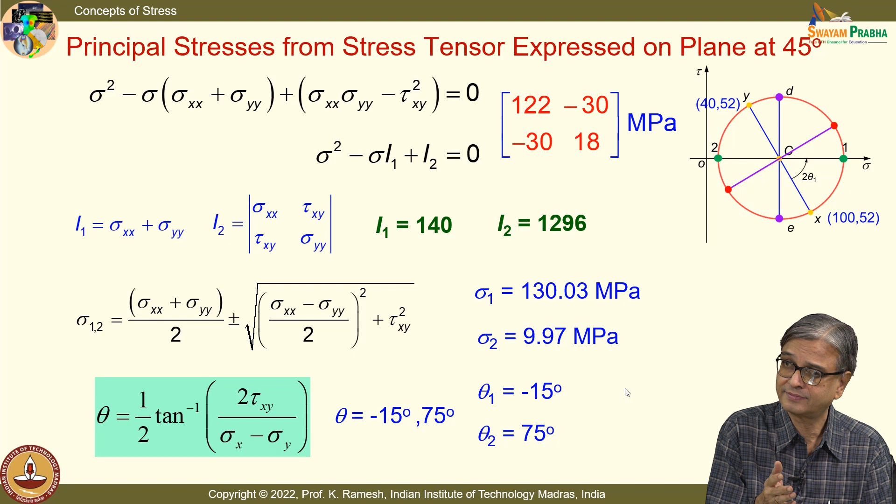So, you have seen for yourself whether I take the stress tensor with respect to the x, y plane or this plane, I get the same sigma 1 and sigma 2. Ought to be, but you have seen it in black and white. And this is the summary, because this gives you the way that you should look at the stress tensor. State of stress at a point can have multiple avatars, all are identical, they look different. Fine. See, Hindu gods are different, but the concept of God is one.

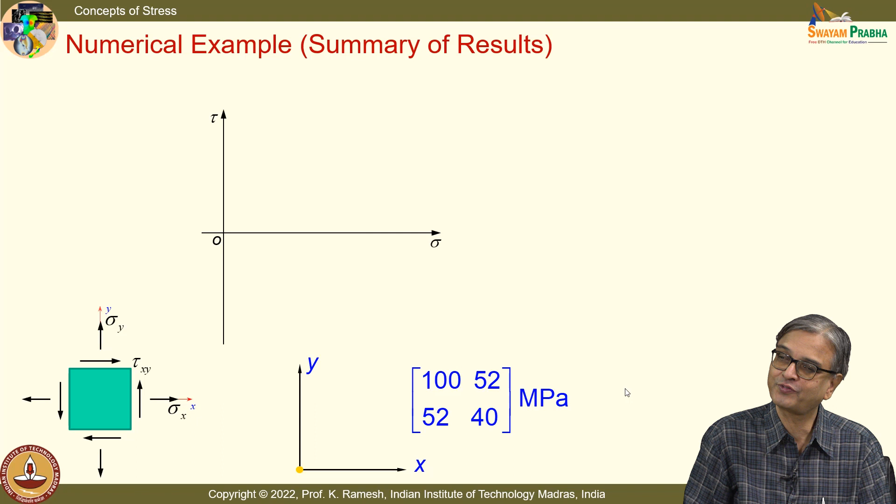You have that expression here. The stress tensor looks different from different planes. Fine. But they all represent the state of stress at a point. The principal stresses are identical. So, I have this 100, 52, 52, 40. Let me mark that as a big blue dot on the Mohr circle. I have the Mohr circle drawn.

Then the second representation is, it can be represented with respect to the principal stresses. The stress tensor appears different. The principal planes are beautifully shown here. So, I have the principal stress directions 1 and 2 shown. With respect to the xy axis I have 100, 52, 52, 40. With respect to 1, 2, I have this as 130.03, 9.966. The stress tensor representation appears different. Okay.

But we have seen that it represents the same state of stress for the point of interest. Then we have also looked at the plane at 45. And what are the magnitudes that we have got? We have got that as 122, minus 30, minus 30, 18. See, here everything is positive. Some quantities are negative here and some quantities are 0 here. It is again the state of stress at the same point. It can appear differently. But from a Mohr circle, it is very easy to see. But from the numbers, it is difficult to comprehend. Okay.

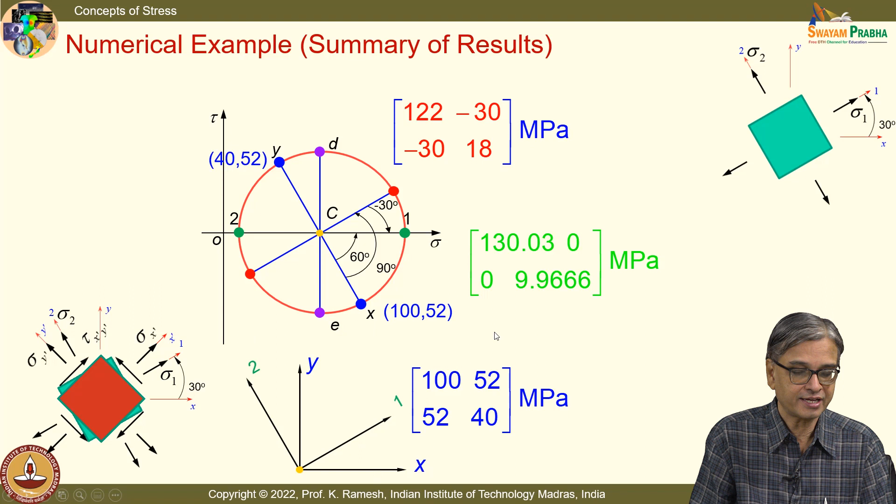So, this also you have the axis oriented here. I would appreciate that you draw this sketch. Okay, I have this represented in this fashion. Stress tensor is represented with respect to the x prime, y prime. I can also represent the stress tensor based on the maximum shear stress plane. I can also do that. I have all the numbers from the Mohr circle. From the Mohr circle, I can pick out this, and this is the stress tensor with respect to the maximum shear stress plane.

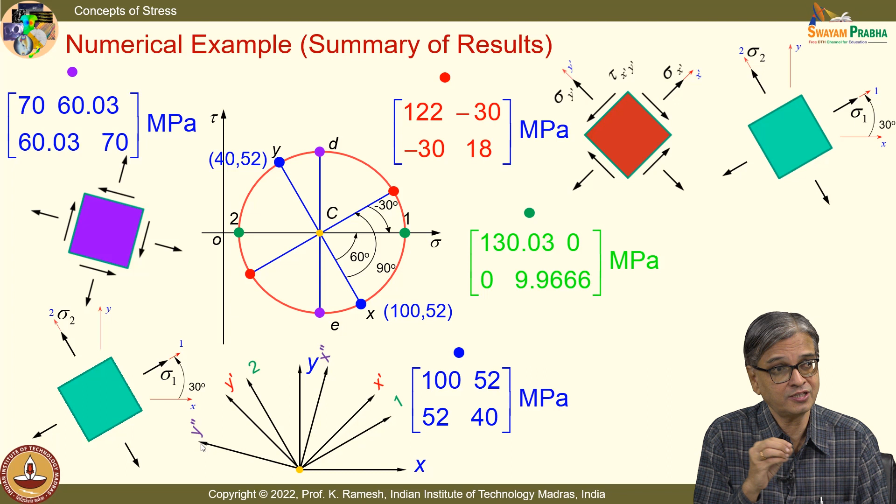So, what we have done is, we have represented the stress tensor from xy, 1 2, x prime, y prime, as well as x double prime, y double prime. All are giving the same values of principal stresses, and using the Mohr circle and the expression for theta, you can correctly fix the principal stress direction 1. Whether it is theta 1 or theta 2, you have to filter it out from your result. Not the first result is theta 1 and second result is theta 2.

So, in this class, we have looked at what way the principal stresses have encouraged the researchers to come out with new ideas. One of the new ideas which we saw was identification of the octahedral stress plane. Other idea was splitting the stress tensor into a composition of a hydrostatic state plus a pure shear stress state. Instead of deviatoric stress state, we will call this a pure shear state, because we know what happens in pure shear, that you are able to identify by utilizing the invariants.

Then we have also proved mathematically that principal stress directions have to be mutually perpendicular, and also saw a beautiful experiment by brittle coating that gave two families of curves on the entire body that show that at every point on the object you have principal stress directions mutually perpendicular, seen at every point in the whole field. Then we have also learned how to do the computation systematically, as well as to do the inbuilt checks. I expect you to do the inbuilt checks and then report the results. Thank you.